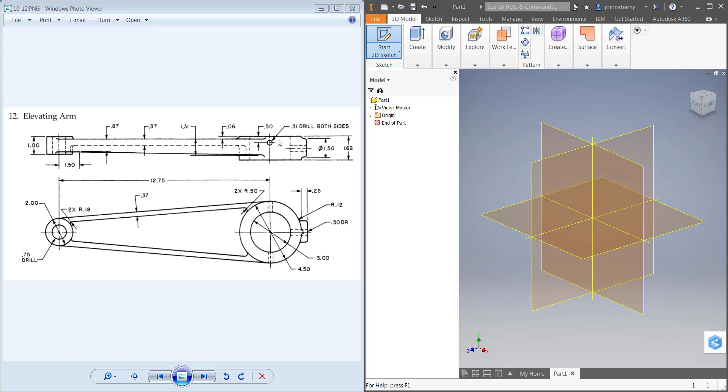In this video, we're going to talk about modeling 1012. It's kind of a confusing drawing to look at, so I'm going to clarify a couple things here. So the first thing you need to do is draw into your XY plane, and we're going to start out by drawing these two circles.

So I'm going to use the outside diameter and inside diameters to draw these. So I'm going to start out with the big circle over here. So my outside diameter is 4.5. Make sure I start at my origin. 4.5, and then my inside diameter is going to be 3. Now I'm going to extrude that a distance of 1.62.

Once I have that, now I could start a sketch on the same plane, that back plane of this circle, in order to get my other circle, because I could see that the backs line up, but the fronts do not. This one's only extruded 1 inch. So I'm going to start on my back plane, and that is 12.75 to the left.

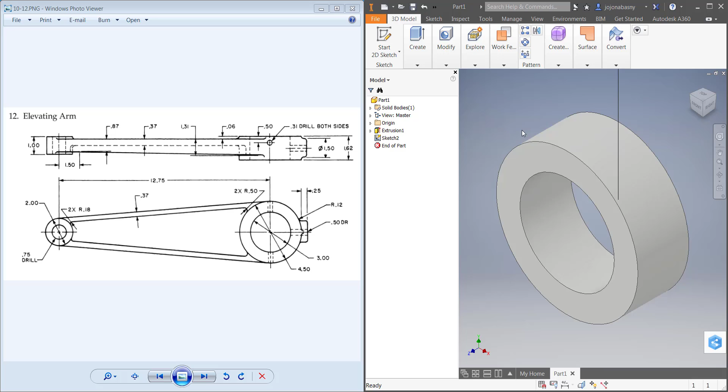So I'm just going to draw a circle over here, and then that's going to be a 2-inch circle, and then I'm going to dimension center point to center point, and then I'll type in 12.75 to make sure that's the right distance. Now I'll make sure that I have my other circle that's a 0.75 drill, finish my sketch, and then I'll extrude that. And that's going to come the same way as the other circle, and that's going to come out 1 inch.

Once you have those two circles, now I could start to get my slanted features here. So I have a lot of options here. To draw these slanted features, I'm going to have to come in 0.06 off the back face. To do that, I'm going to use my offset plane. So I'm going to offset from plane, select my back face, change my direction, so it's negative 0.06, hit enter. So now if I look down at it and I zoom in here, you can see that it's a little bit off the back face.

Now I'm going to start a sketch on that actual plane. So start a sketch on there. I'm going to flip this around so we're on this side of it, and then turn it so it kind of looks like my drawing. Now I'm going to draw a line that is tangent to both circles. So it won't matter if I lock up on the quadrant, because I can use my tangent constraint in order to make sure that it is tangent. So I'm going to draw there, and then I'm going to draw here.

Now I'm just going to go to constraints, select my tangent constraint, select my line and my circle, select my line and my circle, and now I know that line is tangent to both of the circles. Now I'm going to offset it 0.37 to get this size. So I hit O on my keyboard to offset, click my line, typed in 0.37, and now I need to close these off in order to extrude them.

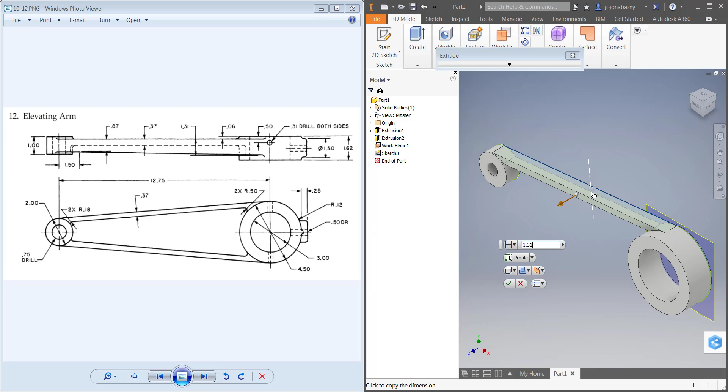Now you're going to extrude this towards the outside of the part, going 1.31, so I'm going to switch my direction and then go 1.31. Got that dimension right here. Hit OK, and now you can see it's a little cut over on that circle, and it's a little far on this circle, so we're going to need to cut this a little bit.

So we're going to start a sketch on this top face and just draw a triangle. So I'm going to start at the bottom here, draw up. I'm going to draw a curved line going all the way across here. It's going to lock up with this point down here. And I'm going to draw a line going all the way back. I'll lock up with that point. Now we're going to dimension this. So we're going to go from this point up to this top line. We're going to make that 0.87. Once we have that, we have our triangle.

And now we could extrude this triangle by hitting E on our keyboard, selecting that triangle, and let's go to the home view so we can see what we're doing. And I want it to go straight down. I want this to go down the length of my extrusion, which is 0.37. And that's going to cut out everything we want to get rid of.

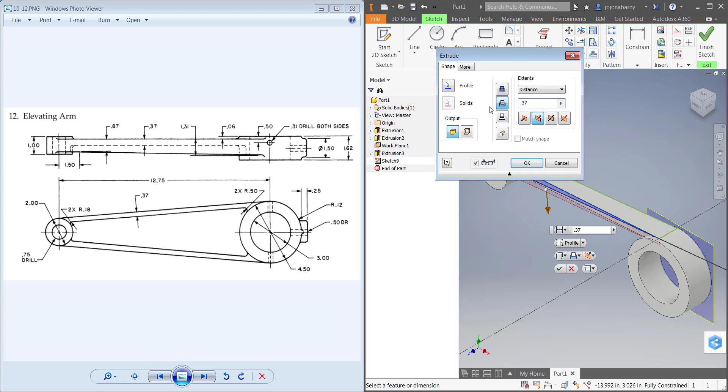Now something you might notice is that this circle is no longer extruded there. It cut out a part of that circle, so we need to redraw that. So I'm going to start a 2D sketch.

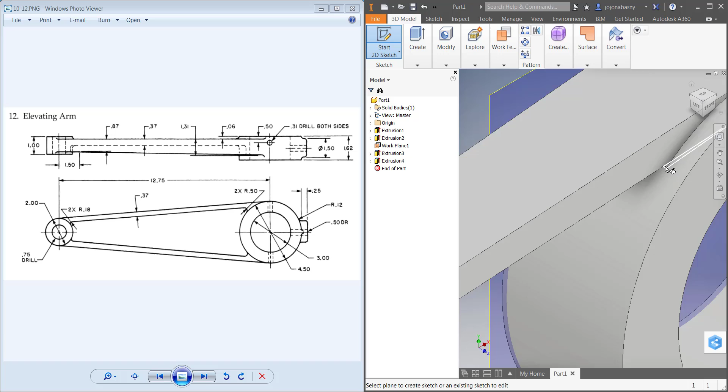And if I actually look over here, let's see if it screwed up this one. We actually have a cutout in here too that this cut into, so we're going to redo both these circles. So I'm going to start a sketch on this back circle, and I'm just going to redraw the circle. No need to use dimensions, it'll just lock up on the circle. Do the inside, do the outside, finish my sketch, and extrude that circle out.

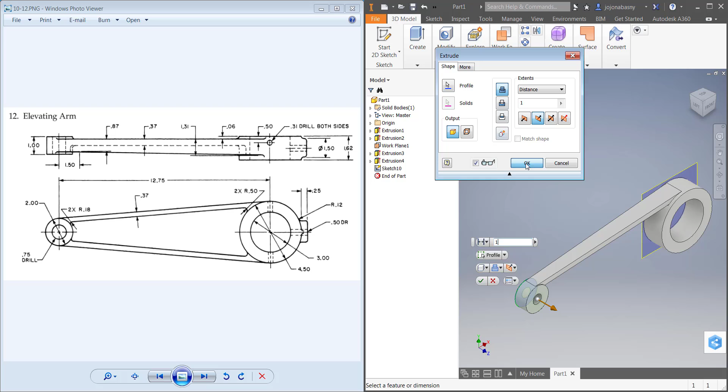Now when I extrude it, I want to change my direction, and I want to bring that out to lock up with the original circle. So that was a distance of 1, and then I'm going to change it to a join instead of a cut, and hit OK, and that's going to fix that for us on that one. So let's turn and take a look real quick. So we're all good, and let's fix this one over here.

So start a sketch on that back face of that circle. We're going to redraw it. Hit E on my keyboard to extrude it. Select that circle, and then we're going to switch directions, and that's going to come out a total of 1.62. And then change that to a join, and hit OK, and that should fix the part that it cut out on that circle too. So yeah, that's no longer there.

Now we need the bottom portion, which is just a 0.37 by 0.37 extrusion. So I could start a sketch on this plane again, and I could draw a tangent line, so I'll just go line to line, and I already put a tangent constraint on this one, so all I need to do is come in here and constrain this line tangent to that circle, and then I'll hit O on my keyboard to offset that, going up 0.37.

Do the same thing as before, draw 2 circles. So I'll draw this circle over here, draw this circle over here, and then trim the excess of that circle out so it makes this a solid feature. Finish my sketch, and then hit E on my keyboard, select the part I want to extrude, and then that's going to come out a distance of 0.37, which I can see right here. Hit OK.

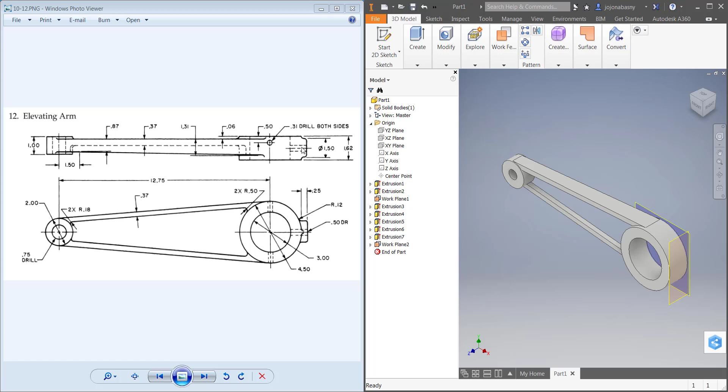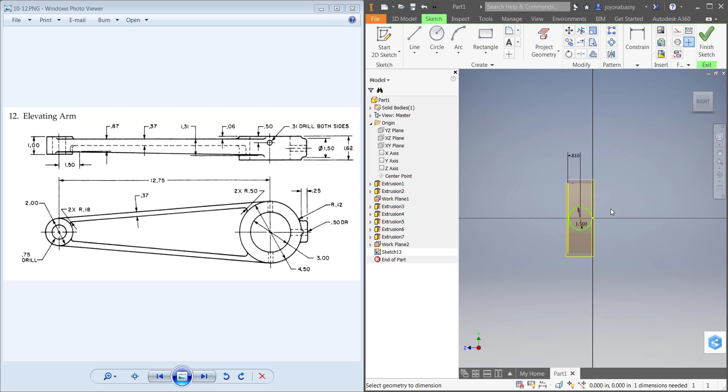And now I'm going to draw a circle on that end because we're given a diameter of 1.5. So I'm going to start a sketch on this work plane, draw a circle of 1.5 diameter, and then I need to make sure that's centered. So I'm going to do a dimension constraint of the center of the circle to the edge of the part, and then I'm going to do 1.62 divided by 2, which is the entire length of the part divided by 2. Hit OK. And now I could extrude that circle out.

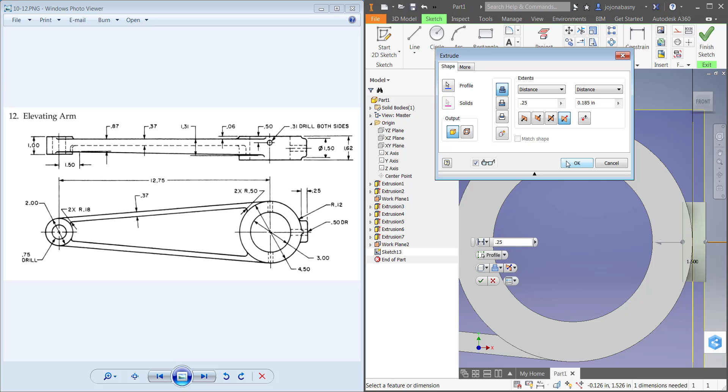So I see here that it wants to extrude this one way. If I look from the front view, then that's not going to extrude into the part, but I do want it into the part. So I'm going to extrude both directions, and now I could see that it's extruding both ways. This says my extrusion is 0.25, so I'll change my extrusion 1 to 0.25. Make sure it's coming into the part and joining it, not cutting it out, and then I'll hit OK. And now I have that circle end feature.

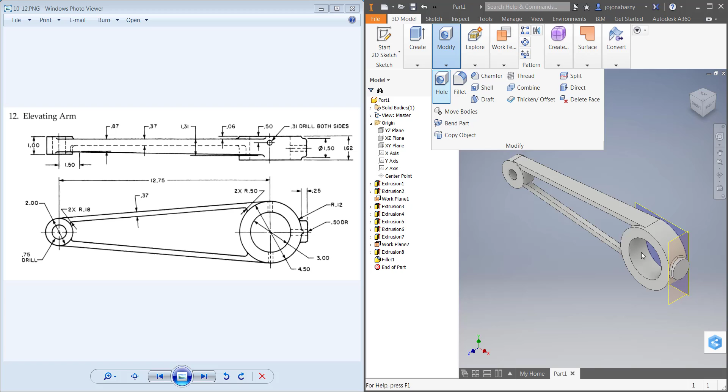I have a 0.5 drill hole through there, so I could place that in. And then I also have a radius of 0.12 fillet. So I'm just going to fillet, select my edge, and then change my radius to 0.12. And then I just need a drill hole. So I'm just going to use the hole feature, make sure we're concentric first, select the center, outside edge, and that's just going to be a 0.5 drill hole. Hit OK. Oops. That went all the way through the entire object.

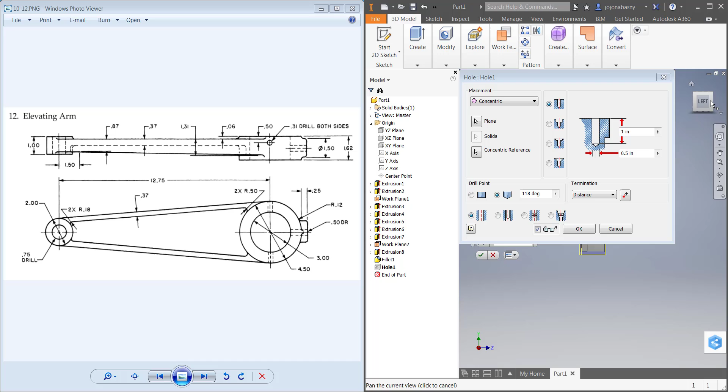So I could come in here and change that, instead of through all, I could change it to a distance or 2, whatever I want to do. Oops, maybe not 2, maybe I'll have to change it to a distance, and then just make sure it's going through this object. So I could even turn it and take a look in this corner, and it is going through there. So if I hit OK, that should be good.

And then that is this entire drawing. Hopefully this video helped you get all the edges and everything figured out for this.